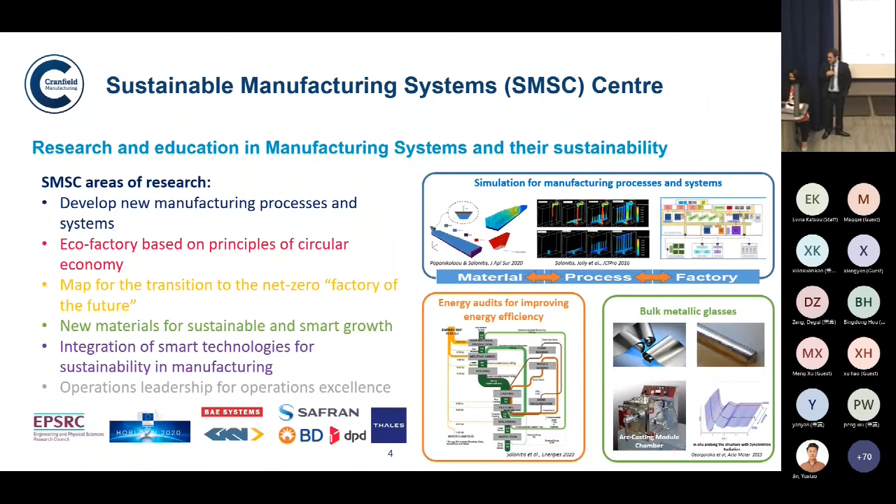Just a couple of examples of what we do. We're using a lot of simulation technologies, depending on the type of the problem that we're trying to solve, all the way from material and what is going on at micro level to looking at what is going on in the case of manufacturing processes.

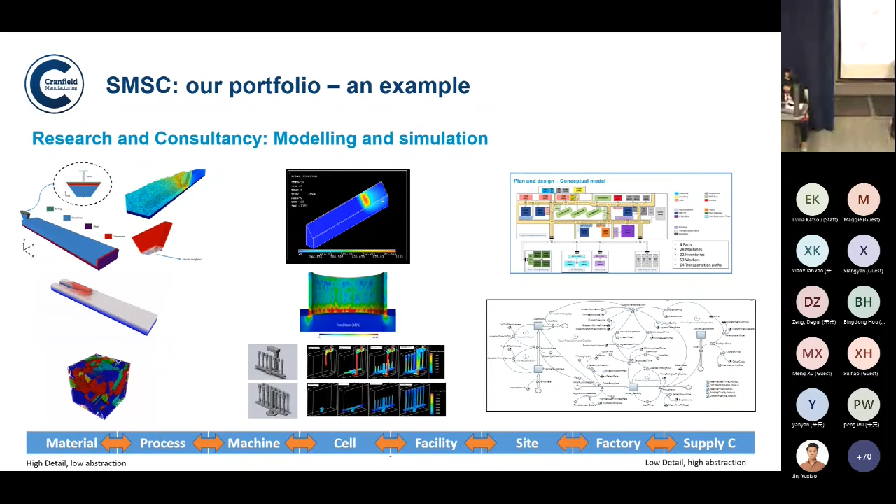A couple of examples here: at the top, it's simulation of a grinding process. Then there's a simulation of additive manufacturing, and also simulation of casting, all the way to what is going on at the systems level, looking at the supply chain, looking at the impact we might have when dealing with specific soft aspect changes in the system, like what would happen if we increase our investment in teaching, in training, and so on.

So, to set the scene, there is a lot of discussion about the net zero agenda, which basically means that what we are trying to do is somehow offset every kilo of CO2 emissions with another way of capturing these CO2 emissions, either through carbon capture and storage technologies. But these technologies, very promising, are not mature enough to be deployed at full scale. So in order to make it happen by 2050, we need to somehow squeeze this red bar as much as possible.

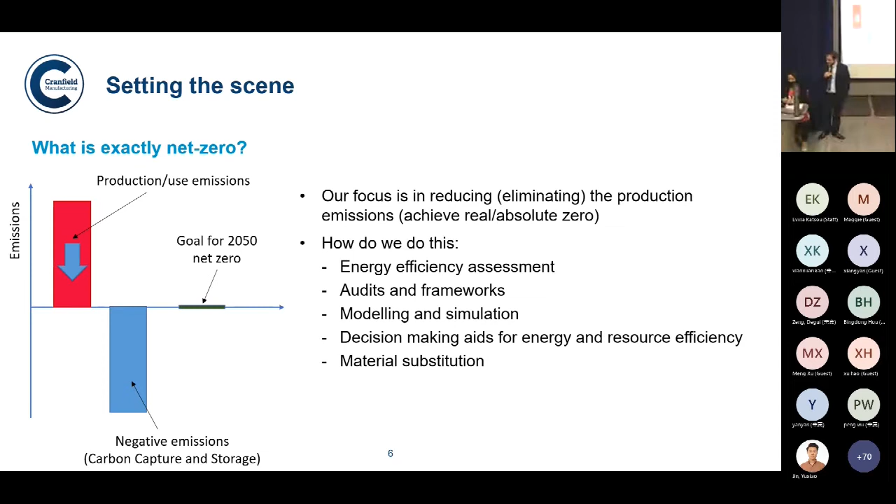So that we make life and technology easier for carbon capture and storage. What we are trying to do, at least within my center and with the projects we are running, is squeeze that red bar as much as possible so that then we can, if possible, reach absolute zero.

And on that basis, quite a number of years ago, we had quite significant funding from EPSRC, one of the research councils within the UK. The idea was to use the 'small is beautiful' approach. So instead of looking at bigger, instead of looking at economies of scale, look at how we can actually use as much as needed and not more than that.

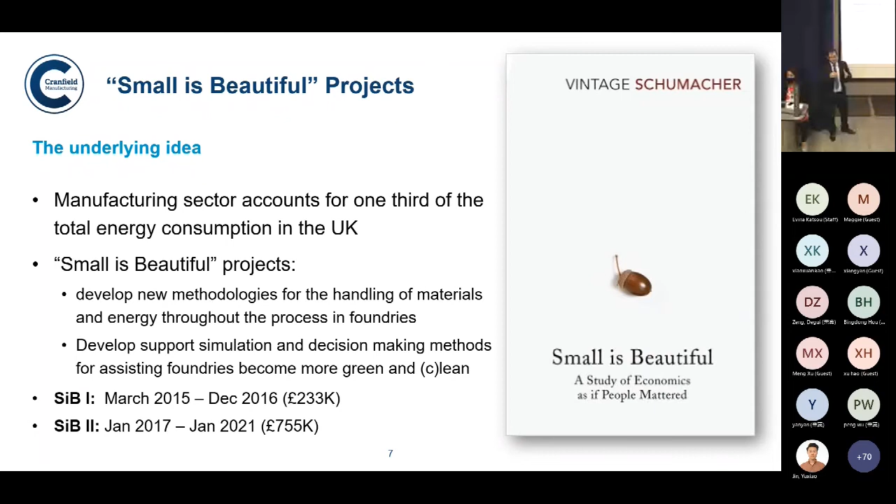Then, in most cases, we melt more material than we need, so we keep that molten material for quite some time - there is some holding time - and that holding time again requires quite a lot of energy, until the time we actually pour the metal into a mold or die and let it solidify, ending up with a final product, which will probably need some post-processing, meaning we'll have to remove some excess material, which might end up being recycled.

So this is quite an energy-intensive process, and just by being so energy-intensive, it's quite important for us to focus on that process. As part of this 'small is beautiful' set of projects, we had the chance to discuss with a lot of foundries to give you an idea of the scale.

Foundries - there are about 600 to 800 foundries in the UK. In China, there are 20 to 30,000 foundries. So the scale of operations is huge.

And all of these foundries are using quite traditional processes. People working within foundries believe, and probably they are right, that casting is the oldest process mastered by human beings. And being that old, that traditional, it's very difficult to change their mindset, to change their ways of doing things.

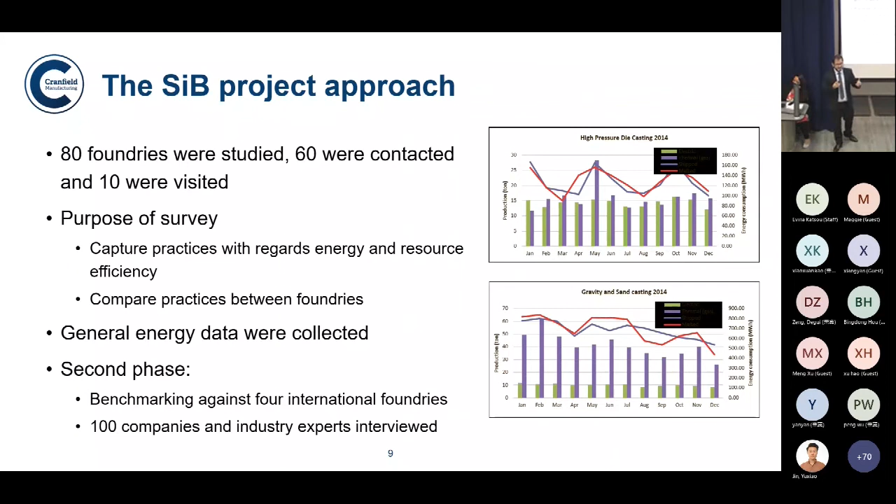But this sort of information cannot give us a lot of insight about whether there are specific process steps that might have to be improved, whether there are areas where we should make some intervention, or specific areas where, if we do a Pareto analysis, we could see where we'd have the maximum benefit.

So next slide, please. On that basis, we developed an energy audit framework that was published a few years ago at the Journal of Cleaner Production. We used that audit framework to go into a foundry and collect data in different settings, from different process steps, in order to identify the areas where it would make more sense to go and invest, to go and do some changes.

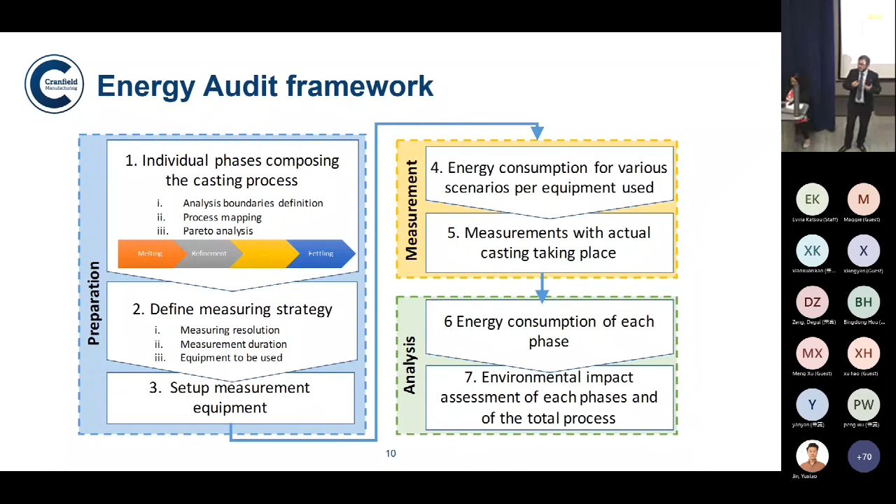Next slide, please. We also worked a lot on the visualization of this data, using different visualization techniques. We used IDEF0, for example, which let us dive deeper to find out exactly what is the input and what is the output of specific processes. Looking also at waste, but we try to get away from the whole notion of waste and consider it as byproducts, because it might be waste for one process but input, raw material, for another. There is reason for us to try to find out whether there is some residual value in that waste as a byproduct.

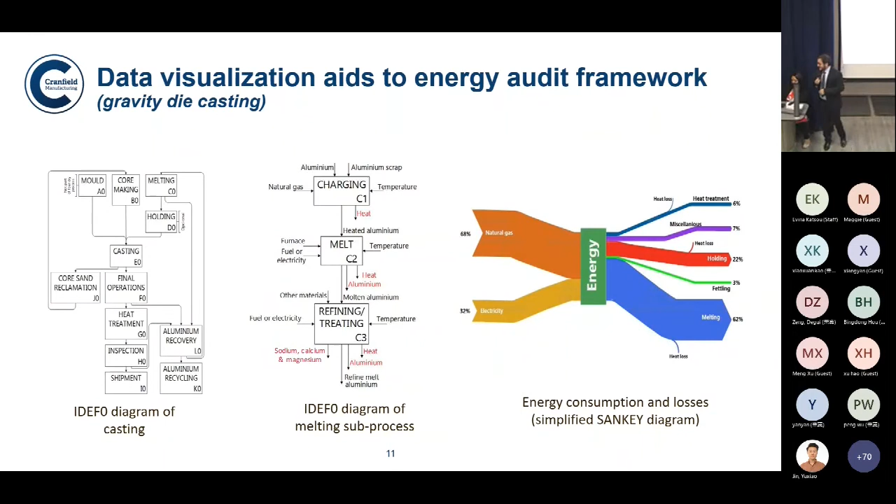And also we use Sankey diagrams. I think in the last four or five presentations, we've seen a number of different Sankey diagrams. We used quite a lot of simulation as well. This was also published a few years ago at the Journal of Cleaner Production. Depending on what sort of problem we are trying to solve, we were using different levels of simulation.

For example, using molecular dynamics, we were able to figure out the optimum cooling rate in order to solidify the material, in this case pure aluminum, or high purity aluminum at least. We could find the best cooling rate and the overheating temperature we should go to in order to minimize energy use, but at the same time without impacting the quality of the final material, so without having, for example, any cavities capturing air or whatever.

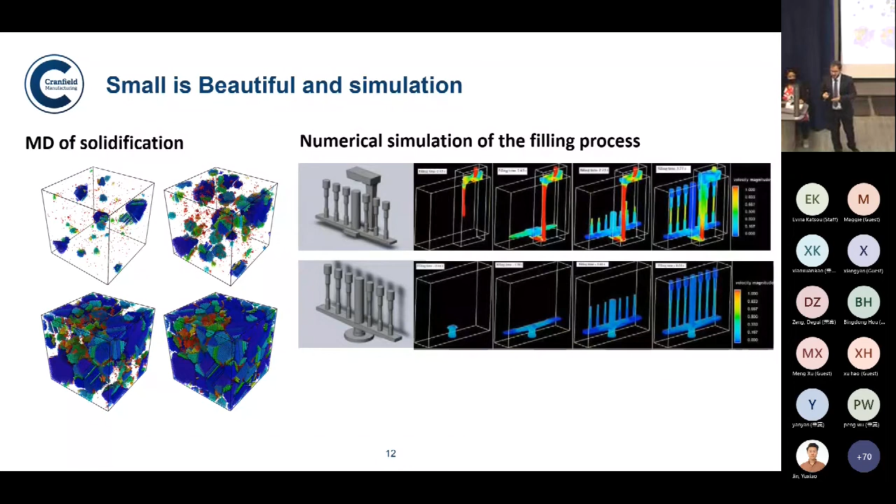In a similar way, we can look at the casting system itself, the design of the mold, the design of the die, so that we can minimize the material that needs to be recycled afterwards. So instead of using conventional gravity casting, by using counter-gravity casting, the material that needs to be recycled is minimized. Again, the idea was to assess the output of the process both from an economic and from a quality and energy efficiency point of view.

Next slide, please. At the same time, in another paper published a couple of years ago, we looked into dematerialization and the impact of using different materials for the same type of product. If we look, for example, at the engine block of a car engine, which is the single heaviest component in a car, we can use either gray cast iron or an aluminum alloy. With gray cast iron, because the material is stronger, the size of the engine is smaller, but nevertheless it's heavier, and there is a lot of discussion about lightweighting vehicles.

If you lightweight a vehicle, you end up having less emissions during its lifetime, during its use. However, if you invest in using aluminum, you spend quite a lot of energy to start with in the manufacturing phase. You have to open up the boundaries to see exactly where the sweet spot is, so that the initial energy spent on the aluminum needs to be offset by using the car for longer. Otherwise, you will never get the return on your initial energy investment.

We found, by comparing three different aluminum casting processes, such as low pressure and high pressure die casting, that we would have to run a vehicle of the same size with the same performance for somewhere between 170,000 and 370,000 kilometers in order to start paying back the initial energy, which is actually quite a lot given the way we use cars nowadays.

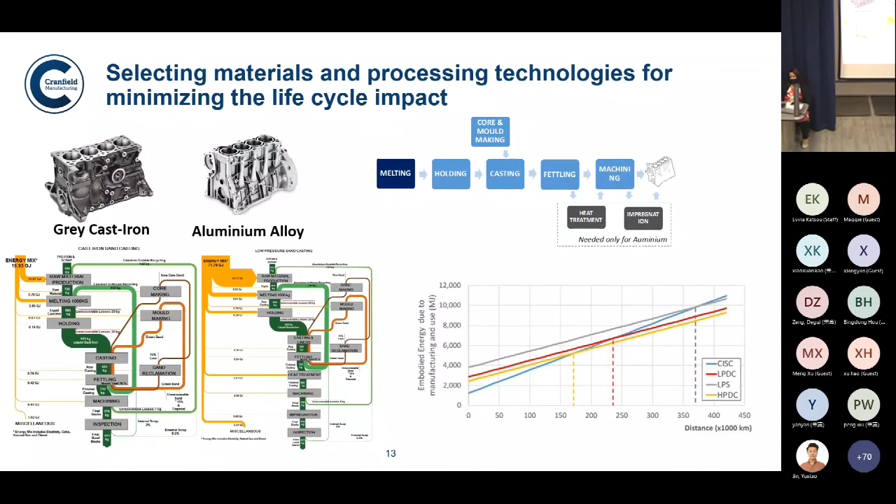Next slide, please. We also looked at coming up with decision-making tools for helping foundries.

Because, of course, energy is one thing. And as I said at the beginning of the presentation, that's not so easy to get across to the foundries. There is also the element of quality, time, and so on. So we use different

multiple criteria decision-making techniques. And the problem with this sort of techniques is that because there are different stakeholders involved in the discussion, you might actually weight the different criteria with different weight factors. So how do you come up with a structured way in order to be able to compare and get some sort of decision made based on data without relying on the subjectivity of the one who is actually weighting the factors? That was published earlier this year in the Journal of Cleaner Production, where we developed an automatic way of weighting the factors and help with increasing the objectivity of the results.

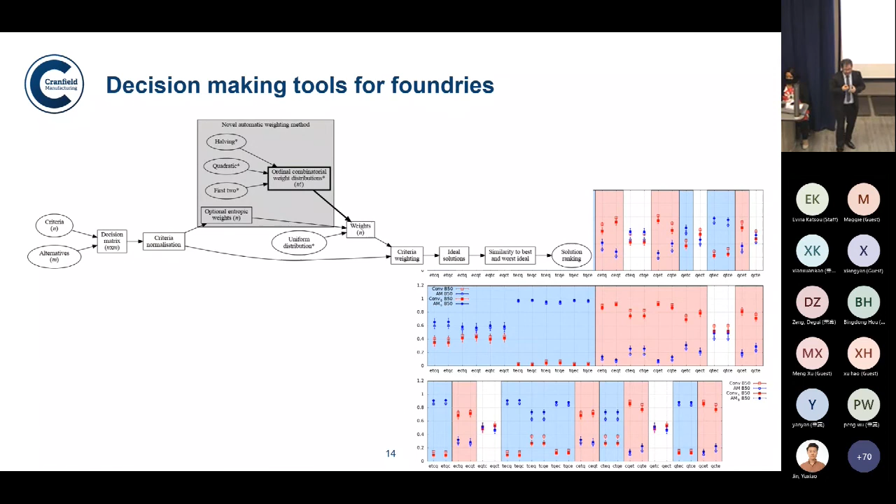Bringing everything together as part of this project, we try to look at developing a framework, a toolbox that foundries, and not only foundries, now I'm working with a number of aerospace manufacturers in order to adapt this framework to their needs as well, where we try to see basically how we can help them decide what is the best approach when it comes to energy efficiency.

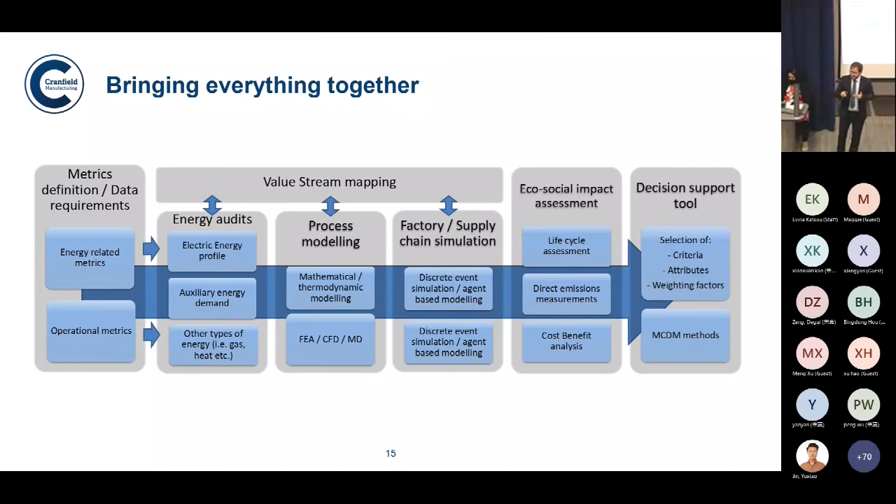So what are the criteria that they need to select? What are the sort of data they need to capture? How to actually use this data in order to end up being able to assess which, for example, supplier is better than others in terms of coming up with a greener product.

That small is beautiful led to a new project. This is called the TransFIRe Hub. It started this July. It's funded from the UKRI. It's part of the Industrial Strategy Challenge Fund. It is a hub with 12 research organizations, 20 Co-Is in total, which makes it a challenge. We've got 50 companies that are supporting the project. It's £5 million funding with another £5 million coming from the companies as a matching fund.

And what we will try to do is look at the different foundation industries. Within the UK, foundation industries are responsible for 75% of the material produced every year. And they are also responsible for about 10% of the carbon footprint of the country. So we will try to work with these foundation industries in order to find out how they can become more competitive, how they can become more energy efficient, how they can actually meet the net zero agenda, and at the same time, how they can work with the local communities where they are based. Because this is something that has not been thought about a lot over the years.

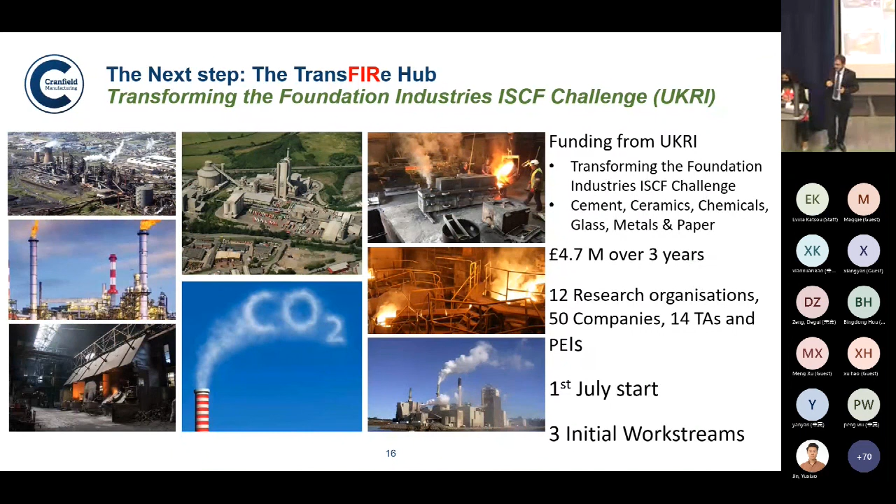The project is led by Cranfield. I am the deputy director of that hub, and in the project there are Co-Is from universities like Cambridge, Exeter, Leeds, York, the list goes on, and I cannot remember all the names. So if you move on, please.

So the idea is moving from this sort of approach where we basically have input, output, and waste. We want to capture as much as possible the different waste streams. We want to use modeling. Next, please. So we have 3 work streams. The first one is about identifying common processes within the different foundation sectors, finding out good practices and trying to figure out whether we can use these good practices. Also using modeling, also using Gentani. Gentani is something that's coming from lean terminology, something that Toyota came up with. It's basically the minimum energy required to achieve a process from a physics point of view, and this can be used as a benchmark. Next one, please.

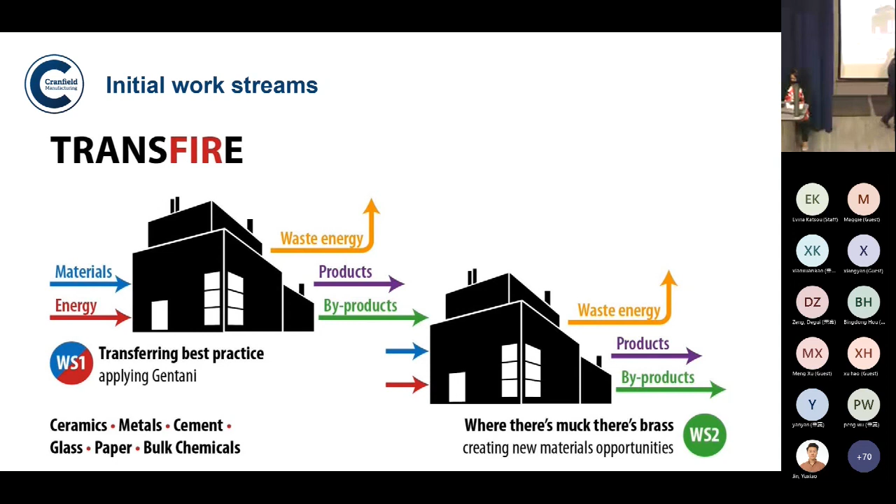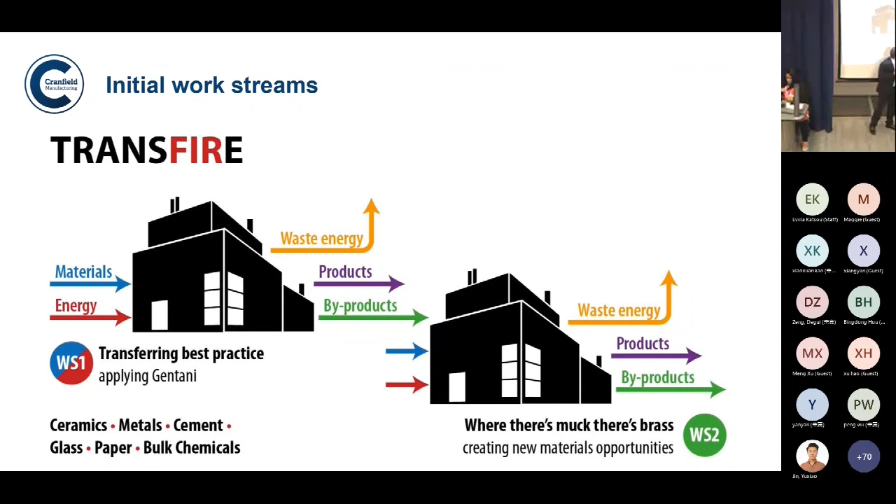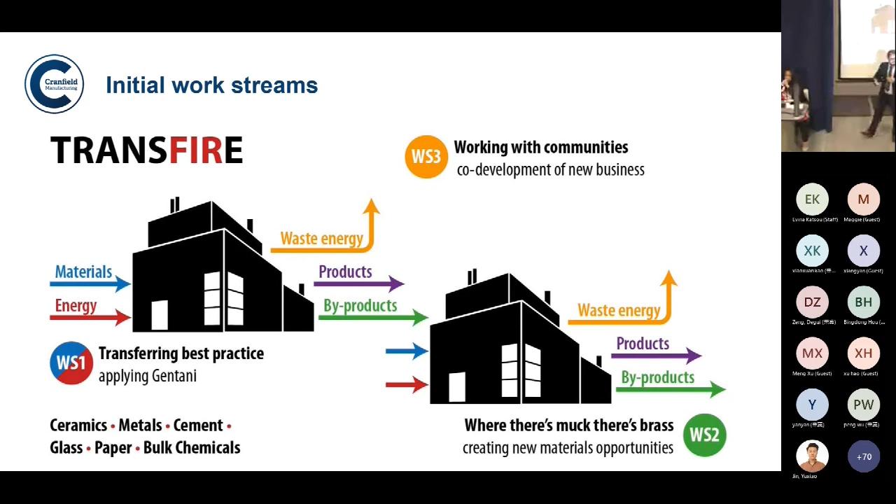Then there is work stream 2, where basically we're looking at the byproducts. So we forget the word waste, we're looking into the byproducts. How can we use these byproducts between the foundation industries? So maybe a waste for one of the foundation industries might be a raw material for another one. And then the third work stream is on working with communities. So for example, capturing low-grade heat and using that for heating local communities, houses, and so on.

And eventually what we want to do is, instead of having traditional black factories, again, this is black again, but instead of having this linear approach, having a more circular approach and working with the communities at the same time. I think that was the last slide.